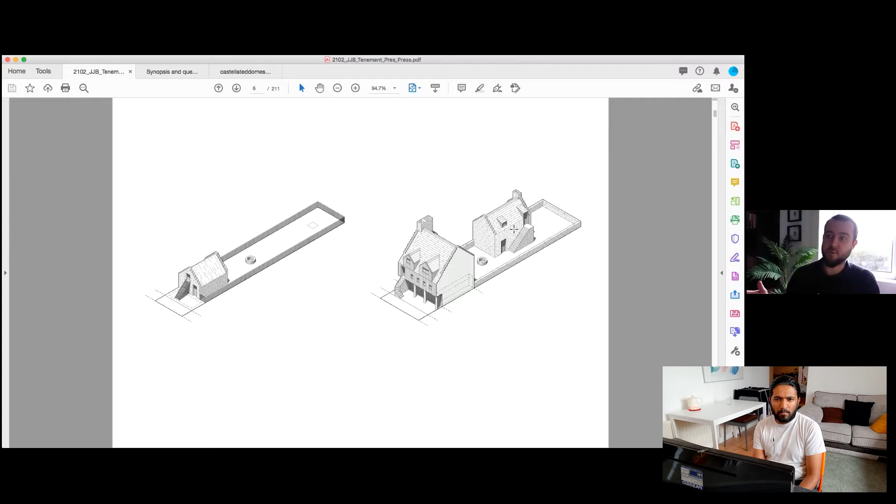As from 1606 onwards - and you can really see this when you look at this map of Edinburgh in 1581 - you can see how small the houses and plots are. It really is maybe 2 to 3 story family houses with still green space in the plot for growing food, for workshops, that sort of thing.

Then really it's 1603 onwards when what happened in Britain was the Act of Union, the Union of the Crowns, when the King of Scotland became King of England, and there was no more of what in Scotland we call the Wars of Independence, the wars with England. So peace came, there were no more wars on the mainland in Britain, and within 100 years, this was Edinburgh then, and you can see how the towns grew as war was no longer an issue. Cities weren't getting sieged upon, trade became a lot freer, and when that happened, population started to grow, particularly in cities like Edinburgh and Stirling.

So that's how the people started to rent their floors out. It was actually a very natural progression of something that started back in the 1200s.

I don't know if you know about this building, Gladstone's Land. This is the oldest surviving example of a tenement from the 17th century, the oldest full Scottish tenement that exists today. It's a National Trust property now, you can go visit it when things are open again.

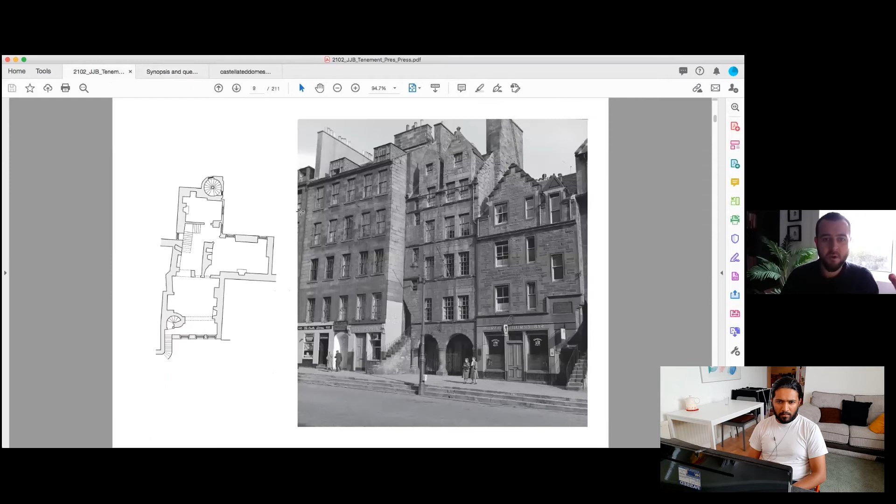So each local borough council implemented rules around the same time in the 1670s and 1680s. This was the Burgh Act from the council in 1677. It's written in Old Scots, broad Scots, so you won't be able to understand it - it's a bit like bastardized English - but it basically says you're not allowed to build any buildings of timber anymore.

They all had to be stone faced, and the reason is stone in Scotland was plentiful and available - they'd been building castles and fortifications out of it for years. Because of the wet weather in Scotland, you couldn't really make good quality bricks, unlike in England, so it was easier to carve stone than make good quality facing bricks. You could make load bearing, pretty cruddy bricks for internal walls, but not good quality facing bricks. So it was really the threat of fire that changed it.

So yeah, you're right - on the East Coast, timber, thatch and render were the predominant building materials, and there are some surviving examples in Edinburgh, but not many. So you're right, but the switch to stone really happened in the 1670s.

So you said you had the Lost Glasgow book by Carol Foreman - this quote's in it somewhere. I can't remember what page number it is, but this is a quote from that.

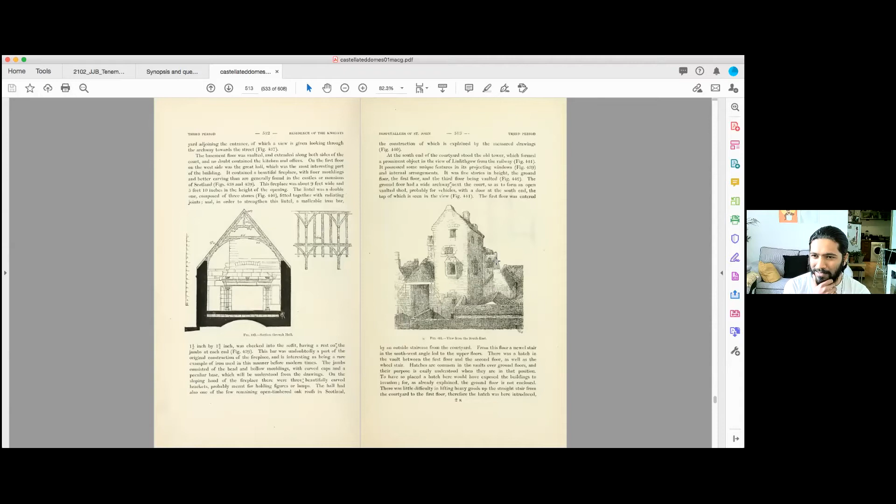Worsdall doesn't really talk about it, but you can see this in the 17 to 21 High Street example—I was just going to tell you about that one. You can see how it has both that castle aesthetic and the stone from changes to the rules of construction, but also has the dormers like Gladstone's Land, which some people argue come from Northern Europe, a sort of Dutch gable aesthetic.

A lot of times people used to call some elements of Scotch baronial the Flemish style, the Dutch style from Holland, because they used to say it came from over there.

I'd say it's more a stylistic thing. This one here is the oldest one we have a record of. It no longer exists, it was demolished by the Victorians, but you can see it's a piece of domestic architecture that has that castle aesthetic, which might be of interest to you, or might be a linking strand between some of your things.

Yeah, that's true, because I came to this idea looking at the Bishop's Castle, which had a tower house aesthetic, and in front of it had the... I forgot the name of the tenement. It had a similar aesthetic to the one you're talking about here, and the plan is also a bit similar to the one we're looking at here. So I thought I could connect that without knowing the other part of the history. There's a lot of cross contamination, a lot of links, it's sort of like a natural evolving thing.

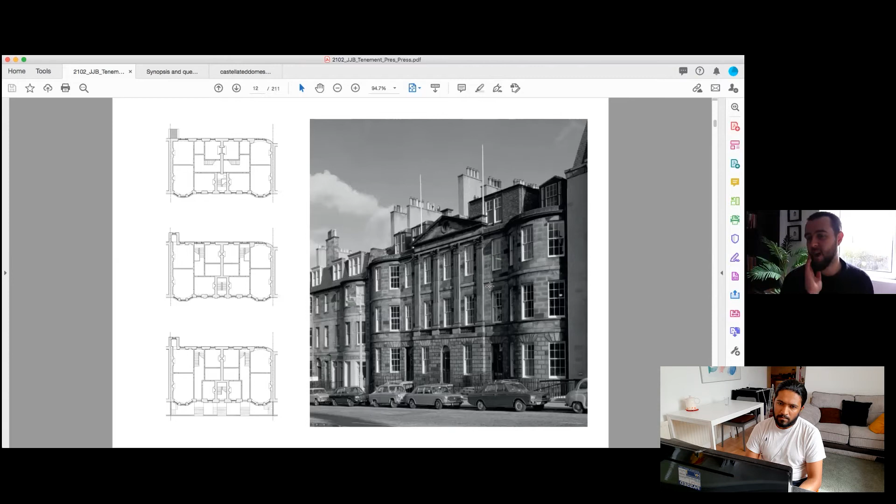So yeah, I would say that the new town movement is really more to do with the Scottish Enlightenment and also this idea of rationalism, but also, as you rightly point out, it's the move of the wealthy, the rich people, out of the medieval sort of areas, the crowded wynds and alleys of the Royal Mile, the High Street in Glasgow, to somewhere more spacious, more open, where you have your own front door. It's almost like what happened after the Second World War, where everyone moved out of the inner city to go and live in suburbia, with your own little porch or your little car. So it's the same sort of thing that happened here. It was a very elitist thing.

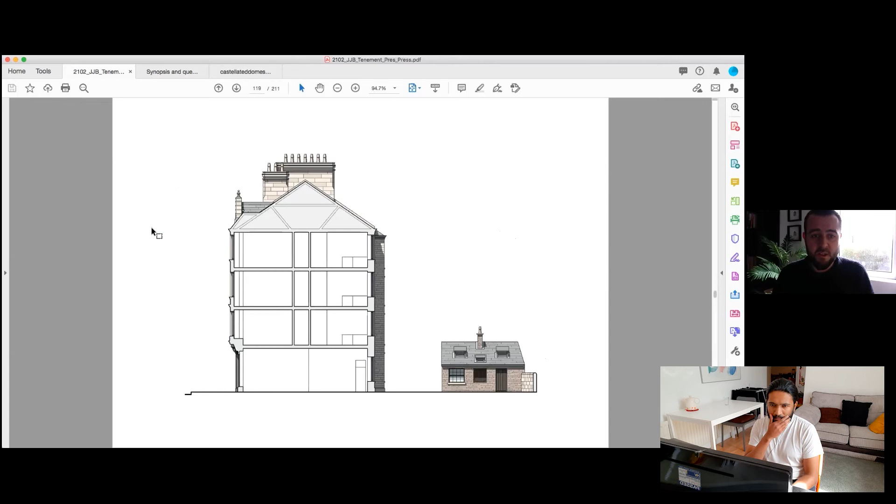So after the City Improvement Trust started building new improved tenements, they had the aesthetic of like castles, a very glorified aesthetic. At least in Charing Cross you can see that. Talking about these guys - yeah, that's the Saltmarket tenements. These were 1892, the Glasgow Improvement Trust tenements, and they do have castellation, because at this period, the 1850s onwards, the idea of castellation, making things look like castles, is a very political thing in Scotland to portray this idea of old Scotland.

It's quite bizarre because you think this is older than it is, but it happens a lot - like stuff like tartan, shortbread, Rob Roy, the stories of William Wallace. Some is true, some is not - they were all sort of made up to some extent. It's completely true - it was two French brothers who made tartan, or codified tartan. It was all this idea of making up a Scottish culture.

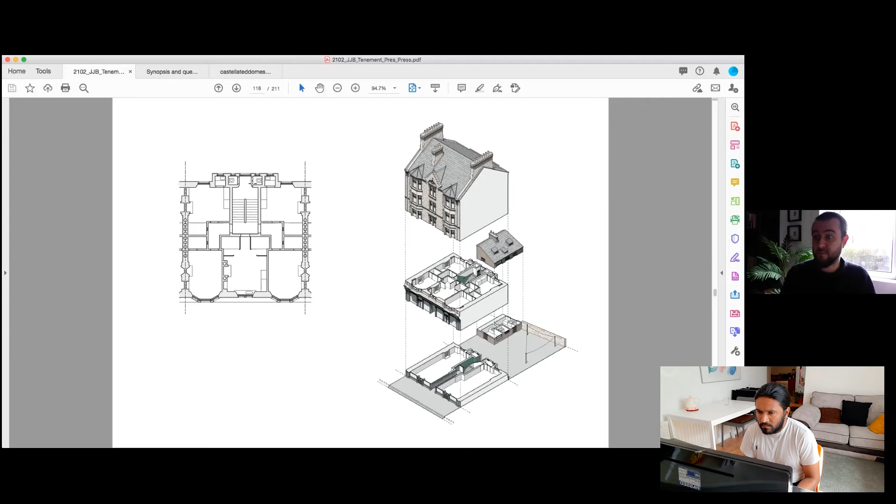To some extent, Glasgow's its own entity, and you do get these little things like this tenement round the corner, a City Improvement Trust tenement by A.B. MacDonald as well. You can see how castellated that is - made to look like a castle, but it's just a tenement. The floor plans are actually pretty poor below the middle class tenements - you come in and there's two rooms, two bed recesses, room and kitchen on one side, and a single end in the middle. This is the lower working class, built by the city for poor people. The only improvement in this plan from the 1870s model, in 25 years, was that the council added an extra toilet.

Worsdall talks about these ones, and he says that's because they wanted a toilet for men and women. But remember, at this time, you could have 9 people living in one of these room and kitchens, so you could have up to 25 people living on that floor. So you say it's an improvement, but it's not really - it's quite odd because the frontage does not match the interior and the way people were living inside.

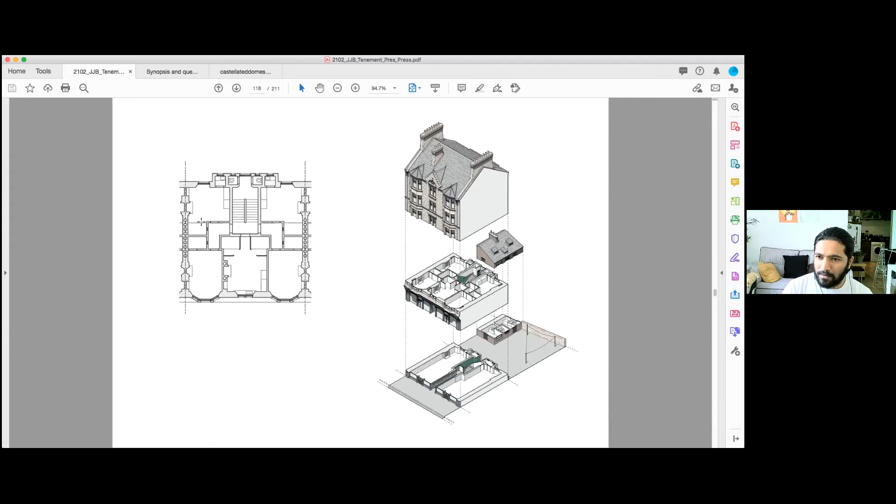So it's a political thing, or a purposely aesthetic choice. But it might be too harsh saying it's just a political thing - it isn't also just a political thing. Remember, these tenements replaced that on High Street. High Street was a very old, medieval street, and it did still have old houses. So what they were also trying to do was knock them down because they were substandard and build new accommodation, but they were then also trying aesthetically - the Victorian idea of conservation was you rebuilt in the same style as what you knocked down. So all they were doing was knocking down old buildings and building new ones in the Scottish baronial style that referred back to them. So there was a bit of architectural conservation, not as we would know it - we would call it a pastiche.

We would call it mimicry, the sort of thing they do in China right now. It's not real, but the Victorians felt it was real. And to some extent it was, because they were using essentially the same construction methods—good quality stone, carving—like they were building the same way people were building 100 to 150 years before.

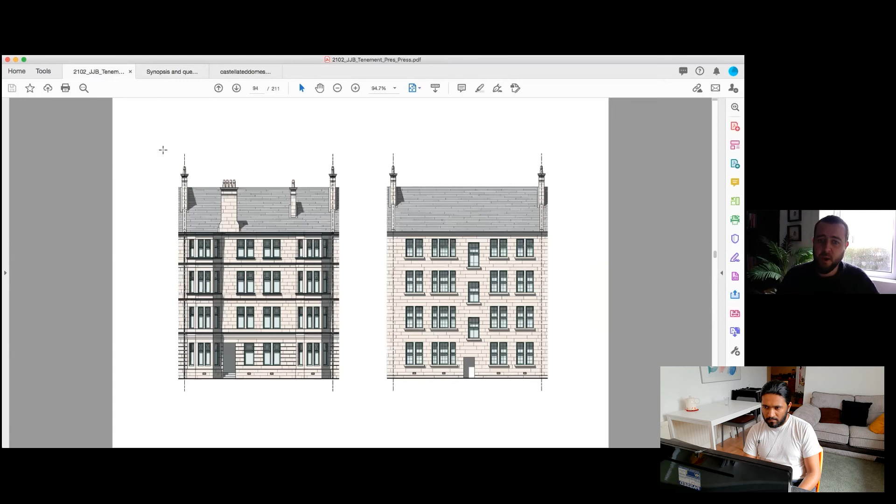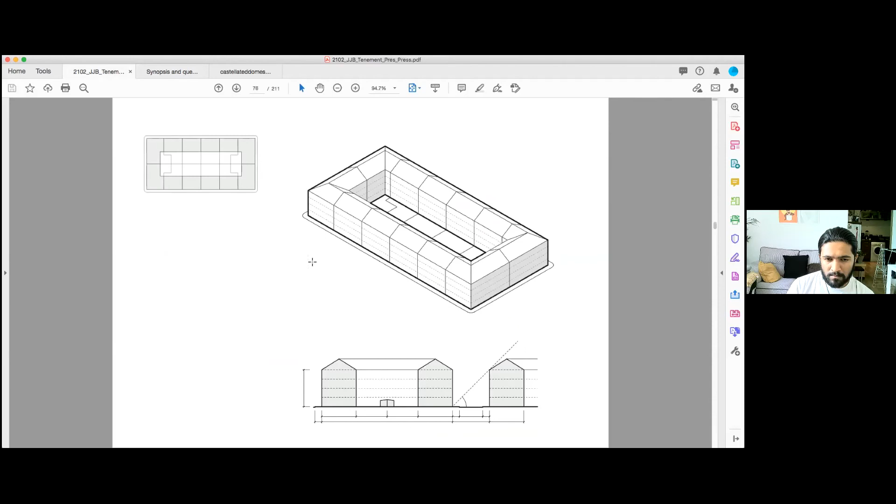But I would say that idea comes from this. You've seen this image, this famous image of the Gorbals. What you're talking about is this idea of comfortable communal living, something which happened naturally through laws and through shared resources. We talked about the City Improvement Trust, and they brought in rules about how far apart you could build tenements. This is a diagram of those rules from 1866. They promoted a model called the hollow square, to allow light in, and all this sort of thing. And there's your room and kitchen that we talked about, with your single end in the middle.

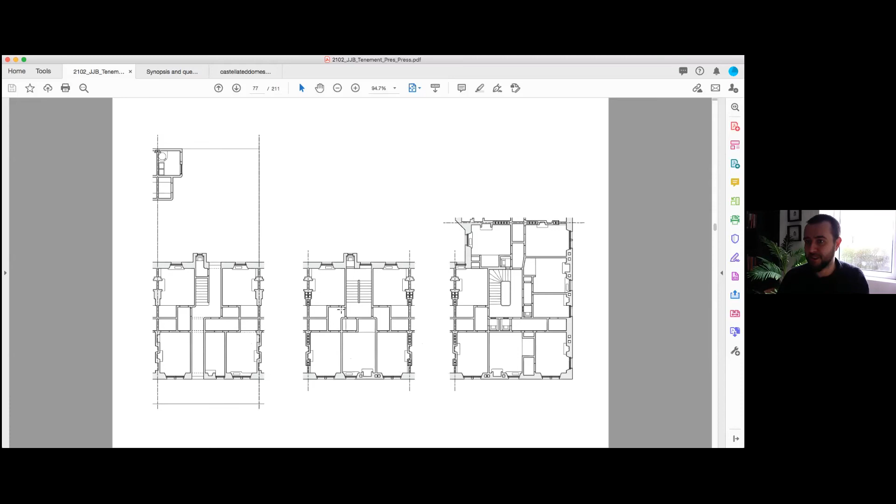So this is actually the tenement, one of the types my granny grew up in. They grew up in this room and kitchen here in the Gorbals on Florence Street. It's very plain architecturally, but still has a classicism to it.

But what people think of is this image here, or what they think of when they think of tenement living: this amazing life of communal living where everyone is living in the back court, sharing washing facilities, sharing toilets, knowing your neighbours, safe places for your kids to play. There's that nostalgia where it's like it was a great place to live because you knew everybody up your close. It was a semi-private space, we were all friends, you left your doors unlocked. People say that you left your doors unlocked, and that's true, they did.

But it was also a hard life because you had to share the wash house. At that time, washing your clothes could take a whole day—boiling the suds, boiling your clothes, drying it. So if you're sharing a washing machine with 30 other families, you have to stick to a rota. You have to talk to the other people living in your close. So it meant people got to know each other.

And what people also don't remember is the factoring system. So I don't know if closes now—like my close has a factor, someone you pay a couple pounds to every month, and they clean the close, clean the gutters, and organise any repairs that get done.

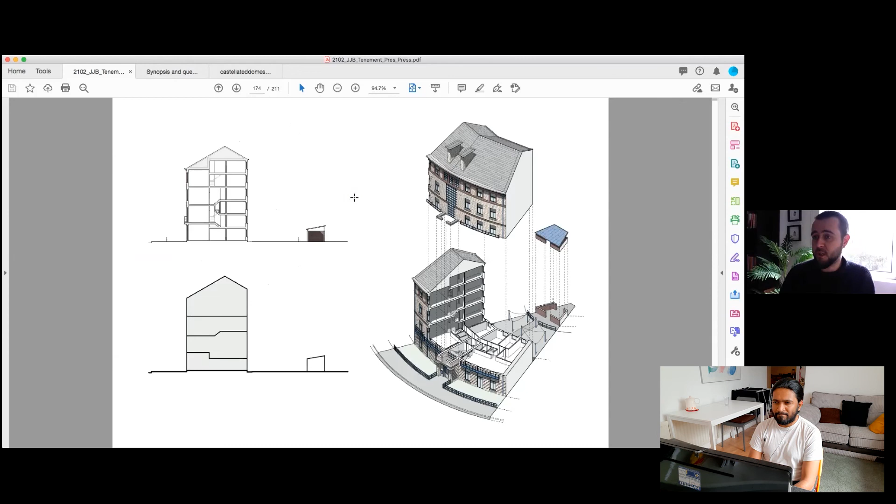And what you're asking is, do the new tenements have the best of that living? I'd say they don't, because they're completely different. The example I always cite is—I don't know if you were at uni when Ken McRae taught there—but his tenement in Shakespeare Street was one of the new tenements, from 1988. When you look at the plan and the section, it's not a normal flat at all, because it's a housing association flat. Every floor is different, every floor has different bedrooms. There isn't a sort of equality of living spaces.

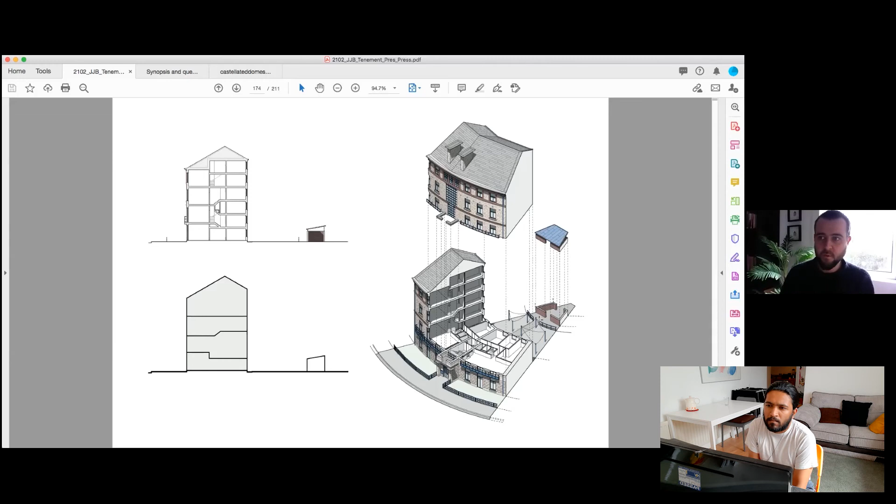People have different arrangements, and more importantly, you're not sharing a wash house, and you're not sharing an outside toilet. So there's no real need to talk to your neighbours—apart from maybe cleaning the close, just to keep it clean. You don't need to talk to them to know when you need to wash your clothes.

So new tenements, like these ones in the Gorbals at Old Rutherglen Road by Homes Partnership—when you actually look at the floor plans, there's a mix of units, a mix of people living here and there. There's also that removal of semi-private space and shared space, because obviously living standards have improved. No one would accept sharing a toilet that's outside anymore, or having a wash house in the back that you had to use to wash your clothes. But that was the thing that gelled communities together.

And also, no one lives where they work anymore. I mean, now they do because of COVID, but what I mean is these new tenements weren't like before—people who lived in them would drive to work. Before, people all lived in an urban block and would work within walking distance, so all the men would usually work in the same factory or know each other.

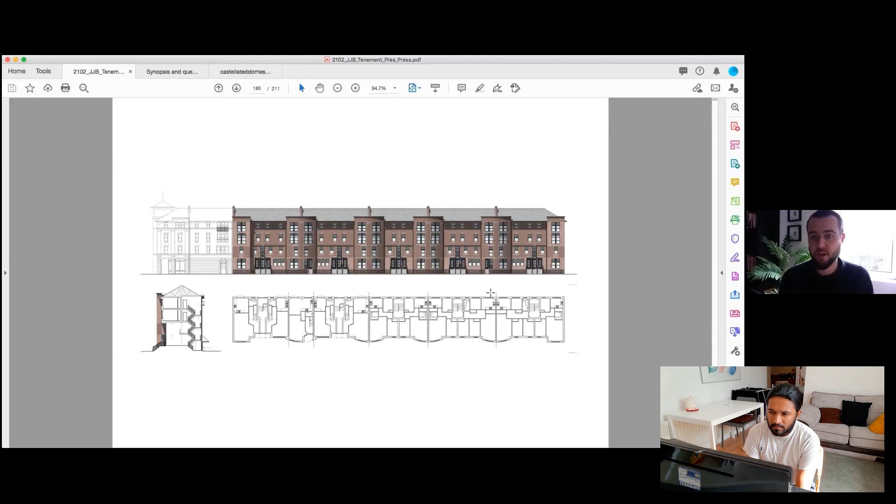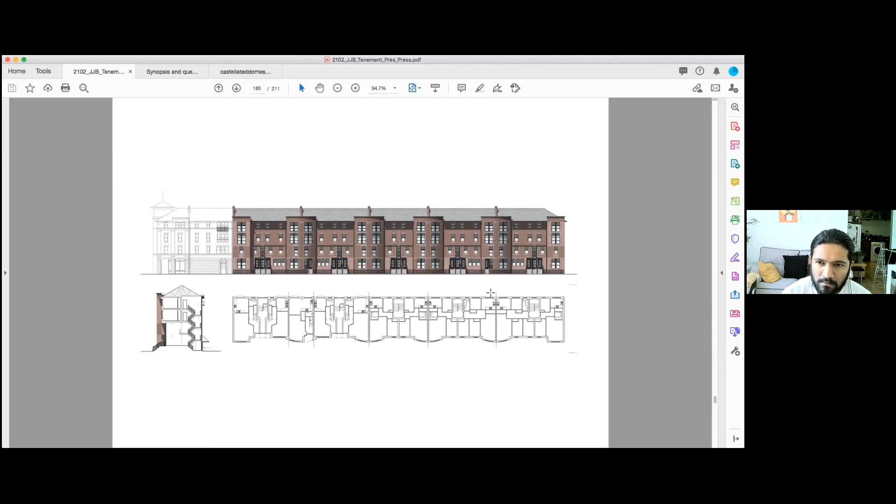Nowadays that doesn't happen. So I think you have to separate that question from the nostalgia of the tenement and what actually living in a multi-story apartment building is today, and what the benefits of that are. I think in an urban context there are definite benefits—sustainability benefits, density benefits, there's a community aspect because there are still shared things, but it's not the same as the nostalgia of the Glasgow tenement.

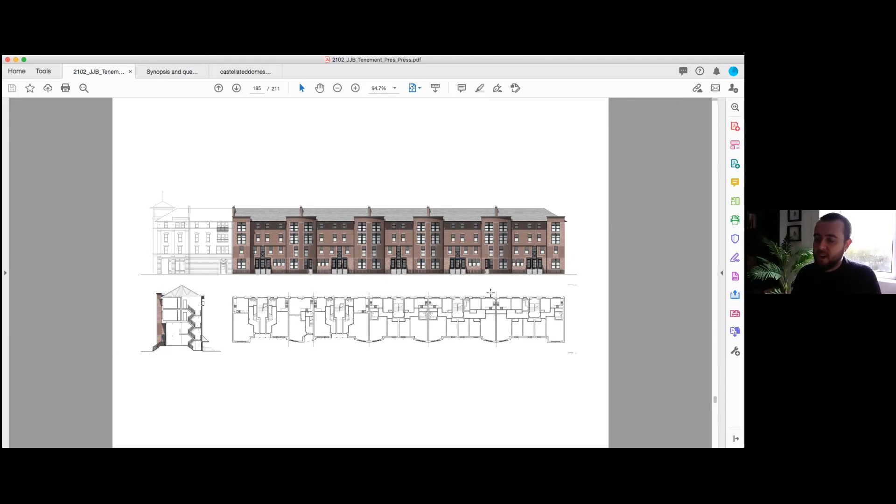So if you're doing research on it, you have to remember that when Frank Worsdall wrote 'Tenement: A Way of Life,' he was writing from the point of view of a kid who grew up in the tenements, sharing a washhouse and an outside toilet. He knew what it meant to live in a real tenement, in a community where you had to share that. I grew up in post-war housing—a completely different generation. So you always have to separate the nostalgia from the Glasgow tenement and analyze it from an architectural point of view.

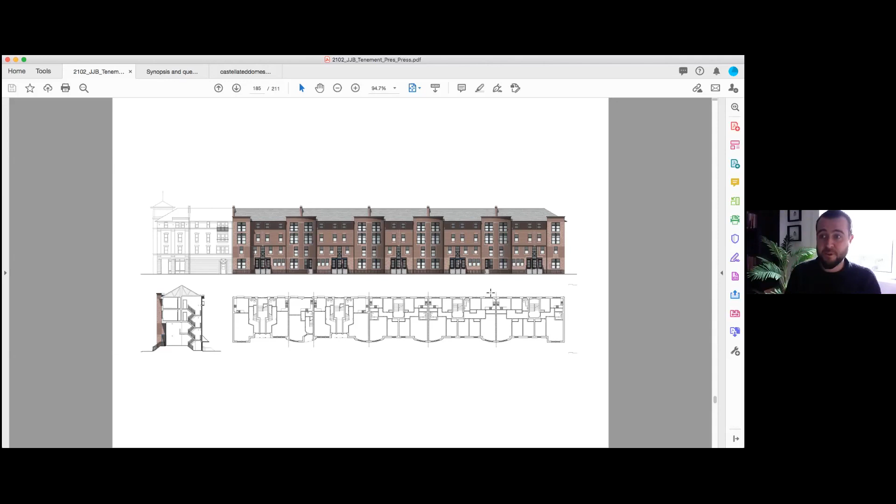What is the difference between these new tenements and the Victorian tenements? There are substantial differences, but also substantial benefits of high density or medium density living that these present. I think that's what you individually need to decide - there's no right or wrong answer. It's what you think is the right answer to urban living. You're really asking: is the tenement, a 4-story tenement, a good form of urban living? And it's up to you to decide.

It's an interesting question, and I think it's one that people in Glasgow and Scotland need to wake up from. They have to understand the differences from an architectural and urban point of view. You can't let yourself get caught up in the nostalgic tale of the tenements - it's a beautiful, very Scottish story. It's unbelievable - the tenement, the sort of homogenizing thing. It's so Scottish - it's like everyone's equal. It's a homogenizing thing, and then it reaches great peaks, and then they all get destroyed. But it's such a Scottish story that Scottish people love it, because you have this idea of an amazing egalitarian urban form, the beauty of Victorian architecture, and then the horribleness of the demolitions after the Second World War that evokes a lot of feelings. I think you have to separate yourself from the story of the tenement to analyze it as an architectural object almost.